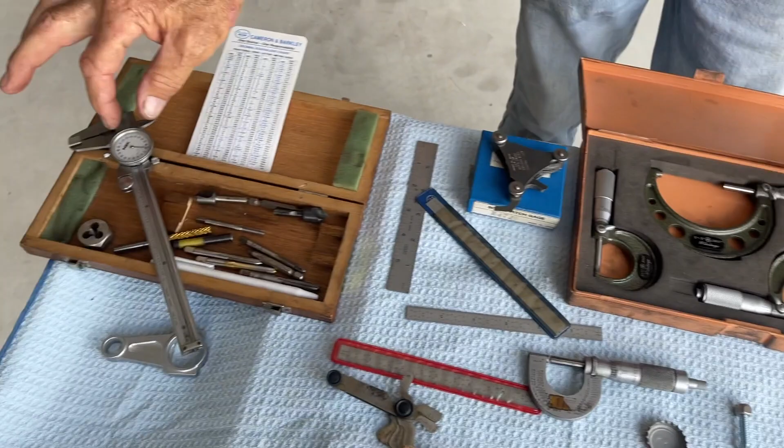And how do you do threads? What is threads? Let's go into a brief explanation of this. Without further ado, let's start at the bottom.

Of course we will. Let's say we have a typical quarter 20. You say, well, how do you know it's a quarter 20? What does quarter 20 even mean?

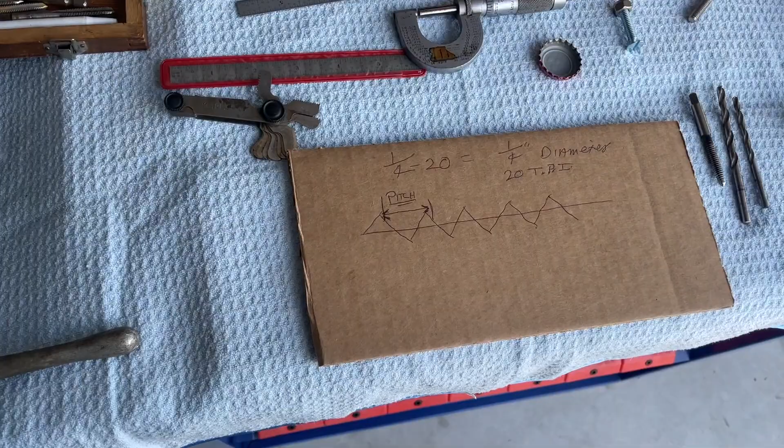I drew up a little chart here, and if you'll have a look, see, here's what it says. In this bolt that we have here, it tells you that the diameter is 1/4 of an inch. Now that's outside diameter, even of the threads or the... it'll be both.

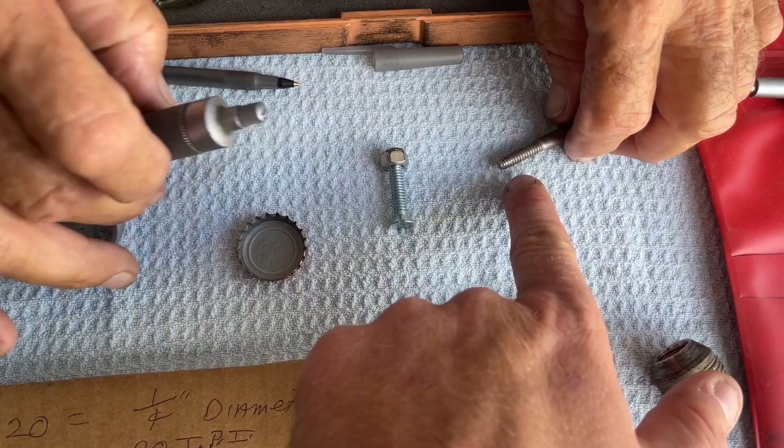Say if we're going to measure it here, let's take this one. Notice we have both. This is a Brown and Sharpe instrument here, some micrometer. There's several companies that make them out there. You just want to check it.

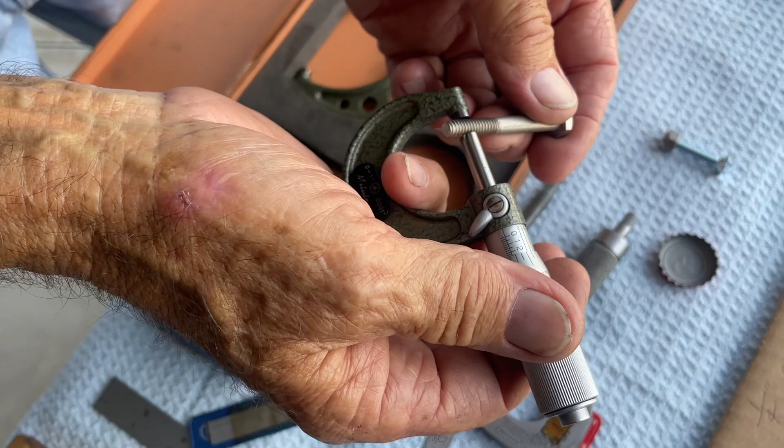So let's take... and that's 1/4 of an inch. Now, it measures the same out here on your threads, 1/4 of an inch.

Now you're saying, whoa, hold it just a minute, you're getting way ahead of us here. Let's start with our micrometer. How do we read this? How do you read that? How does the mic read?

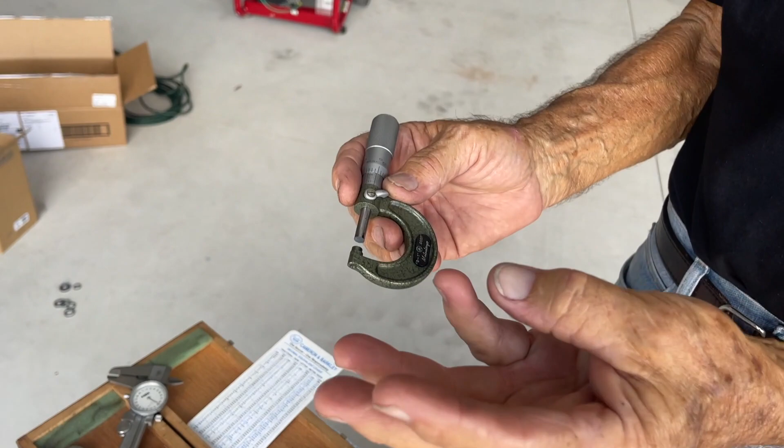You're saying, what is that, a micrometer? This particular one here is from 0 to 1 inch, is what it will measure, by 10,000ths of an inch. That 0 to 1 tells you that by 10,000ths of an inch it will measure that full 1 inch. It's quite accurate for such a little gauge, a little piece, sure is.

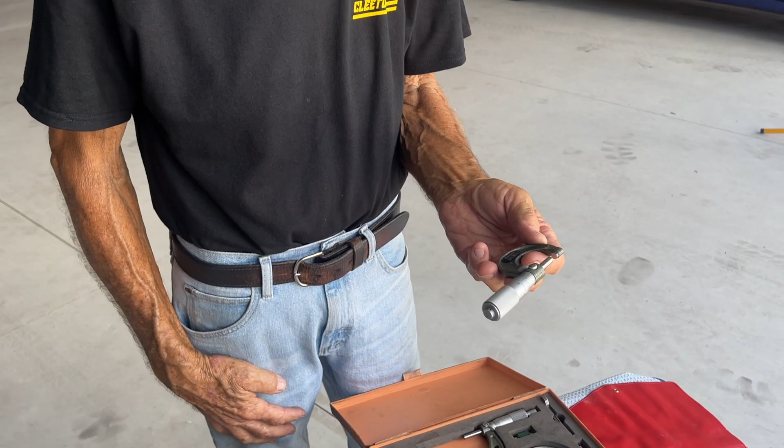And you're saying, well, how does it do that? Well, it in and of itself doesn't do it. It's up to the operator to do it. So let's take that. First thing we're going to do is check our instrument.

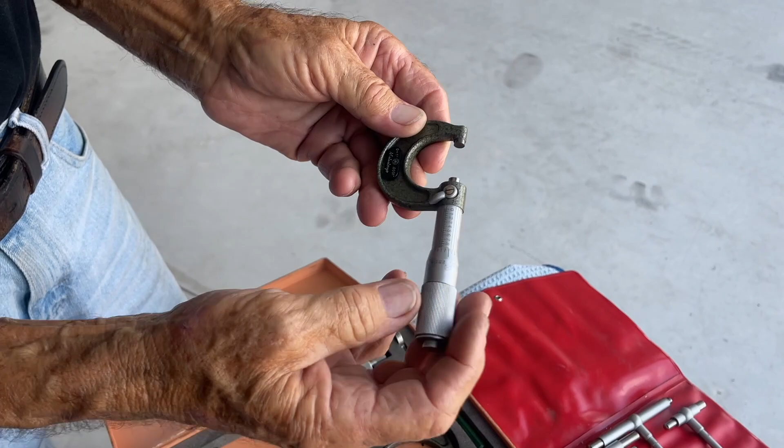And we're going to come out here to 1 inch, which is here, and that's from 0 to 0 here. That'll be a full inch out this way here. So, well, okay, what do?

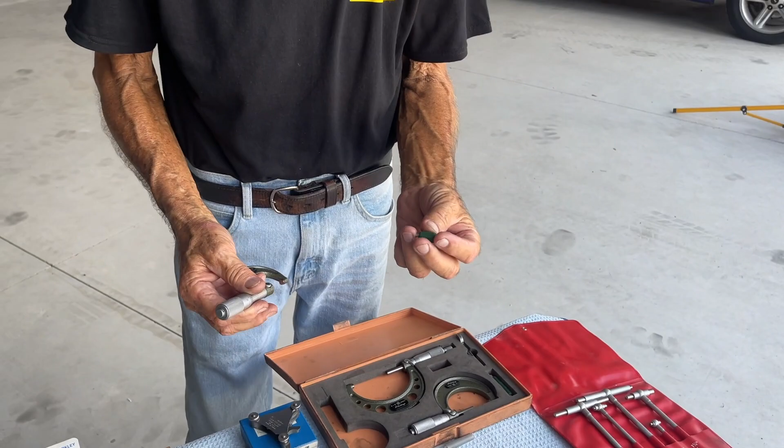Got your, when you buy that instrument, it comes with its standards. This is within about maybe 20 millionths of an inch accuracy on this.

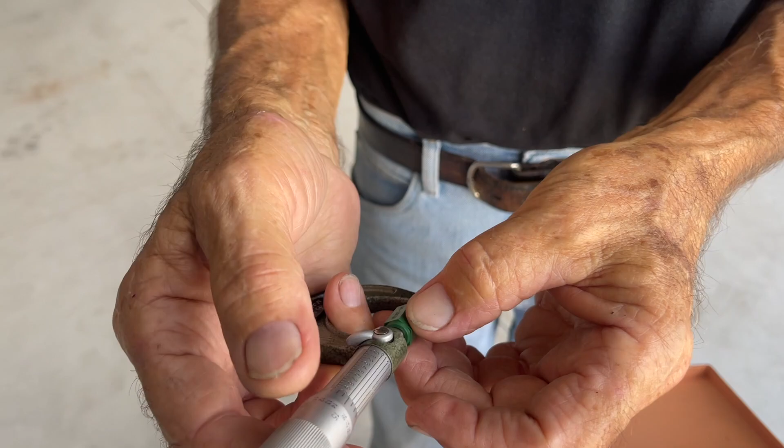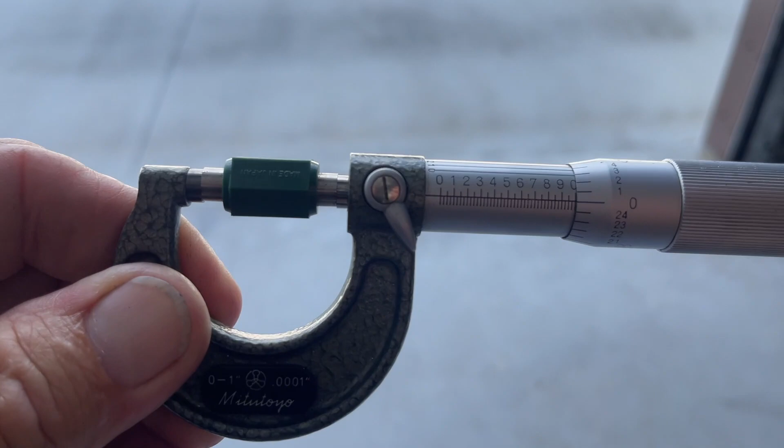So we're just going to check this to here and see, is it there? Where you at? Wouldn't you know it, double zeros? Let me get that. It's all the way through.

Some people ask me sometimes, well, how do you hold one of these? It's a delicate instrument, yes. Why not do this? It's a little machine shop practice. Just take your little finger, hook it into that thing, and then you got the others to work with here. Can't get out of your way here. There it is, there you go.

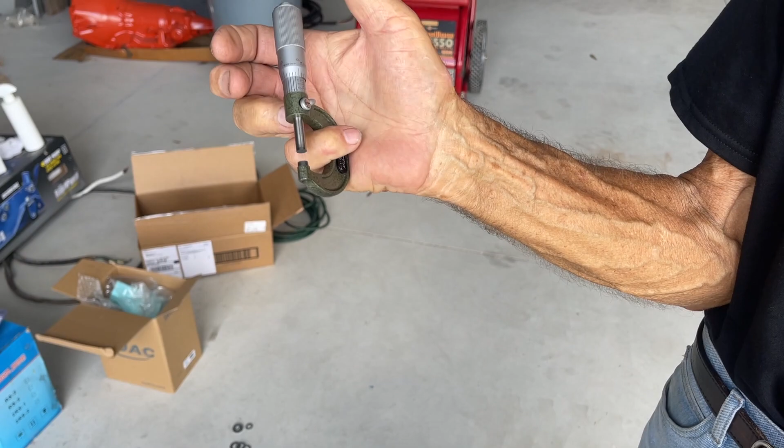And you can take your part when you have it like that and just bring it up and measure. There's Sam's tip of the day. Turn it up right to here.

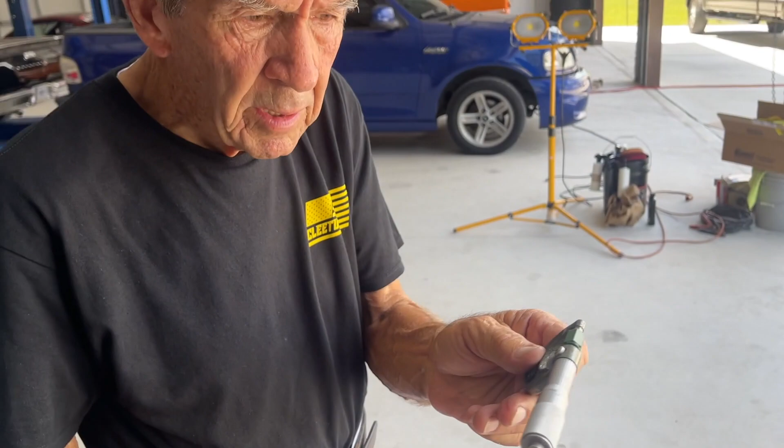So now let's look at the instrument while we have it here. You have your standard set in here, it measures the inch. You say, well, what's all them little lines and stuff around through here? Let's go into that briefly.

Let's take our standard out, I'll just drop it out here. Notice the way this is graduated. You have 0, and you got a little line, and then a big line.

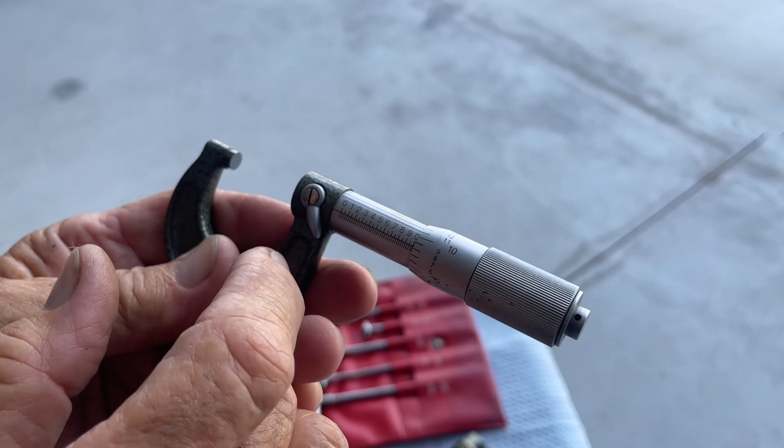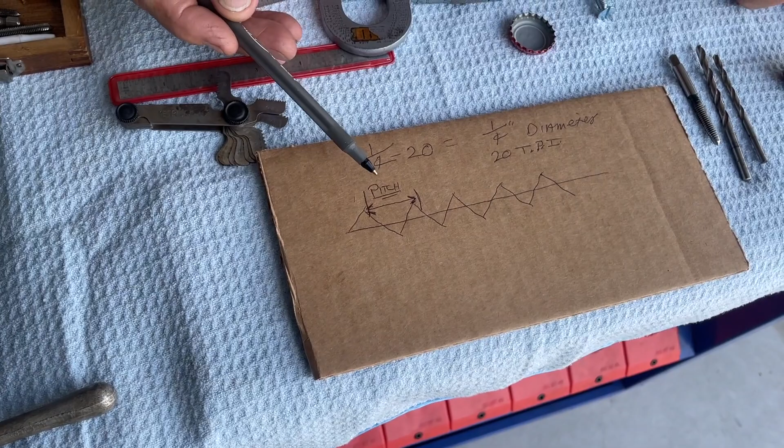That is this, imagine this thread running through here, if you will. And the pitch of that, when you turn this one revolution here, say let's come down to, let's start off down here at the very bottom.

And this right here is called an artificial feel, if you will. It takes it away from you trying to wind it up. So when it comes down, so that you don't over tighten it or underdo it, see, it does it, and it'll just keep spinning, but it's at your 0.

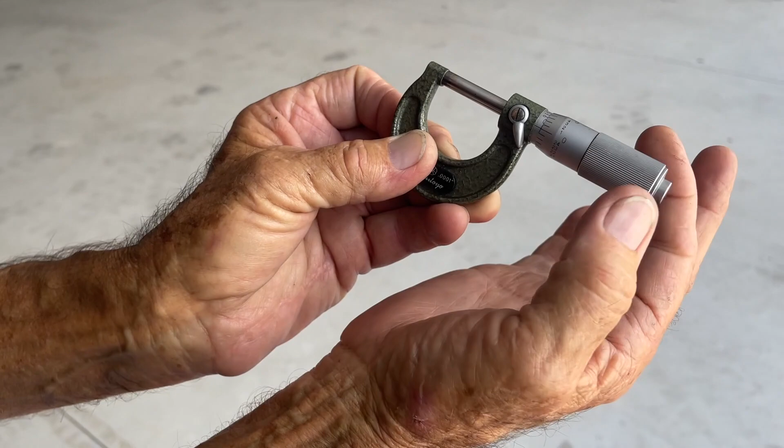Okay, so now if we go out here, one full turn. This thing's graduated from 0 to 25. So let's go one turn.

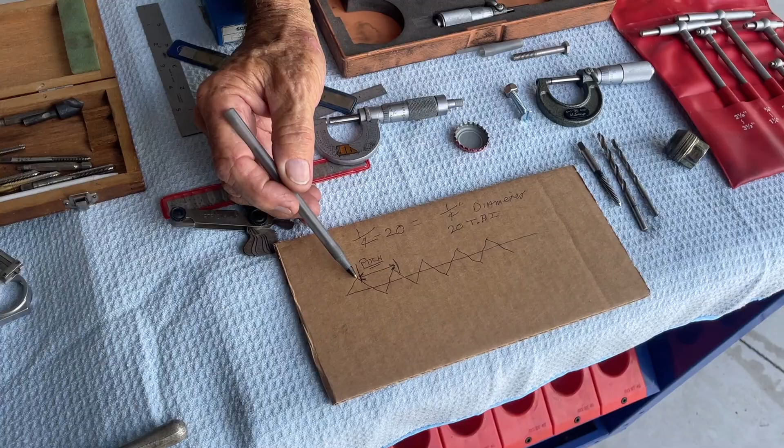That's 25 thousandths of an inch. That's where the gap here will read 25 thousandths. Looking at it on paper, that gap would be going from here—this is the high point of a thread.

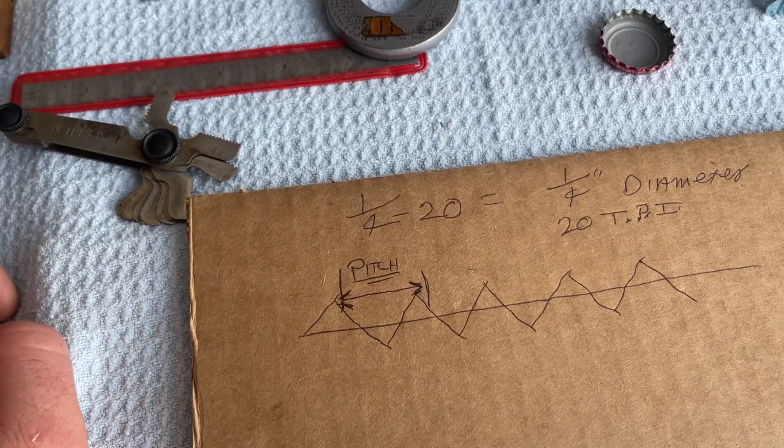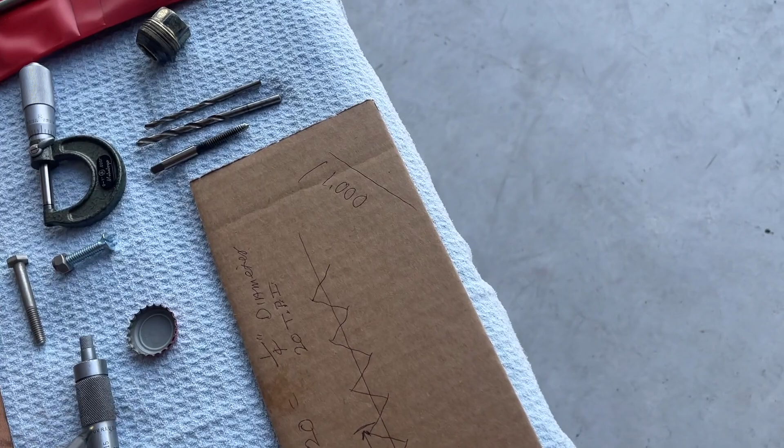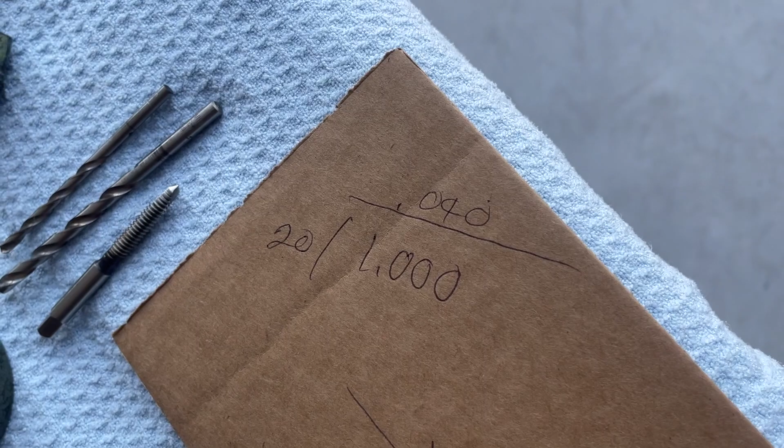It's fuzzy math. We had a quarter-20. Twenty won't go into that, so if we've got 1.000... what does that tell you? That tells you the distance on your pitch—from here to here, here to here.

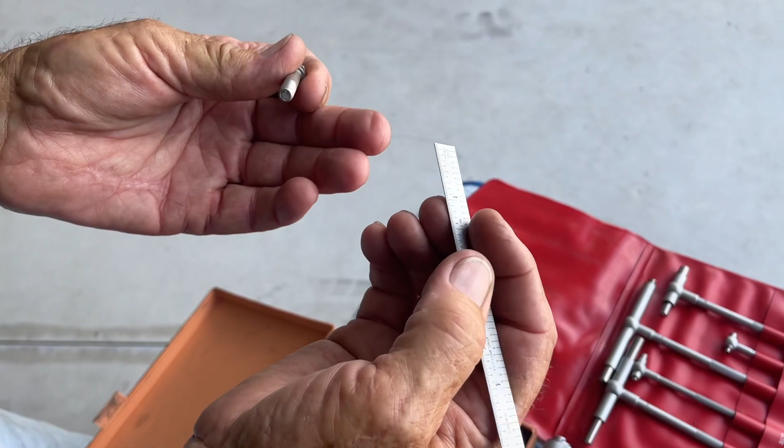That is that distance. So with that said, that 20 is the threads, and this is the full inch we have here. Let's take our scale—a scale is just a quick measurement of something, graduated in tenths, hundredths, thirty-seconds, sixty-fourths.

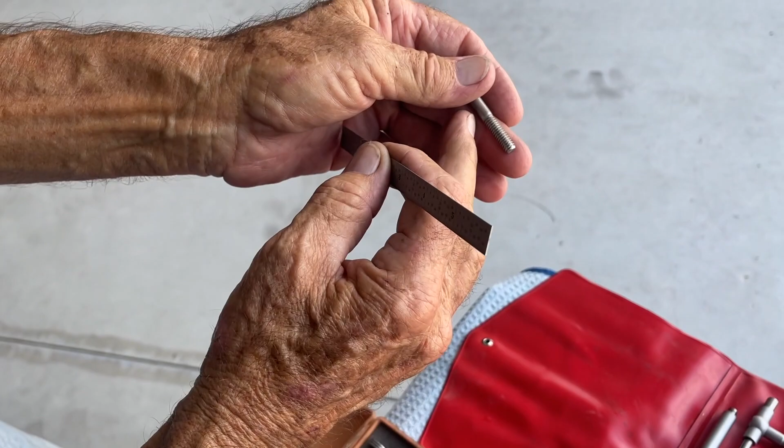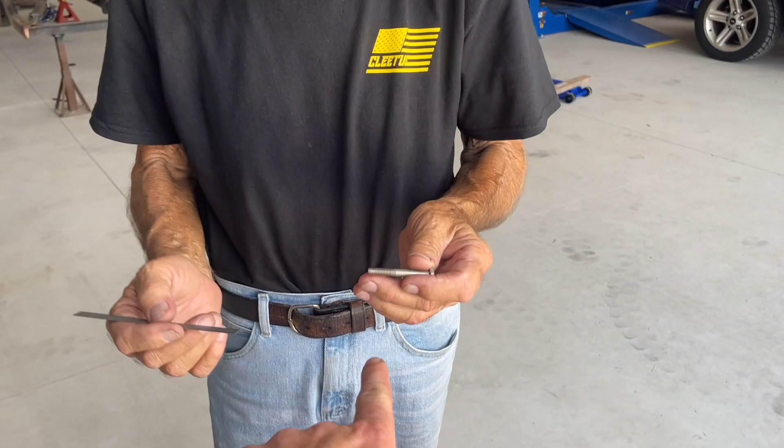Let's say we were going to do a full inch here. It's not quite cut down for a full inch, but in that inch we're going to have 20, as indicated, and in 1 inch of bolt length we're going to have 20 threads. So a quarter-20 means it's a quarter inch in diameter, and there's 20 threads per inch.

The pitch is the distance between one point on your thread here to the same point on the thread over there. That's the pitch, if you will.

In our next session, we're going to the metric system—don't try to compare, like this equals this, or 9/16 is to 15. Let's let each system stand on its own. Today we're going into SAE. SAE stands for Society of Automotive Engineers, so when someone says that's an SAE, now you know.

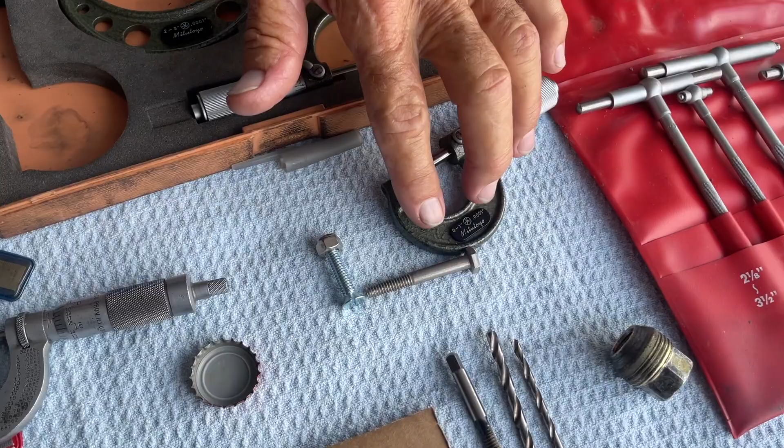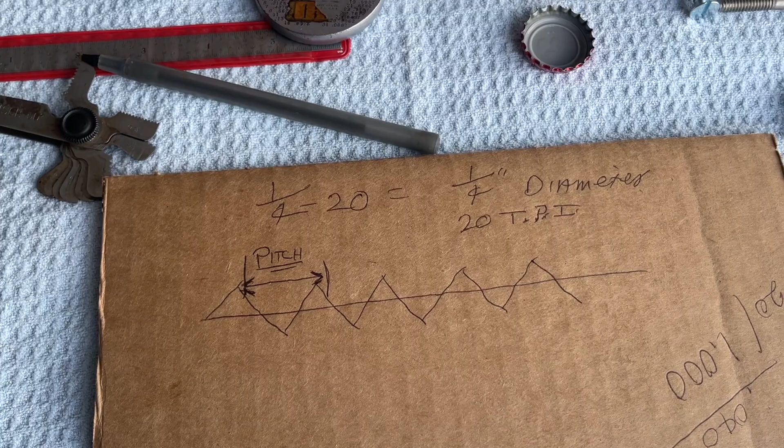The quarter-20 bolt we have here—we know how we got to the threads, we know all the particulars of this bolt. We also know the pitch is from one point on the thread to the other. And when you're referencing this, not all bolts are that way, but now you're going to know.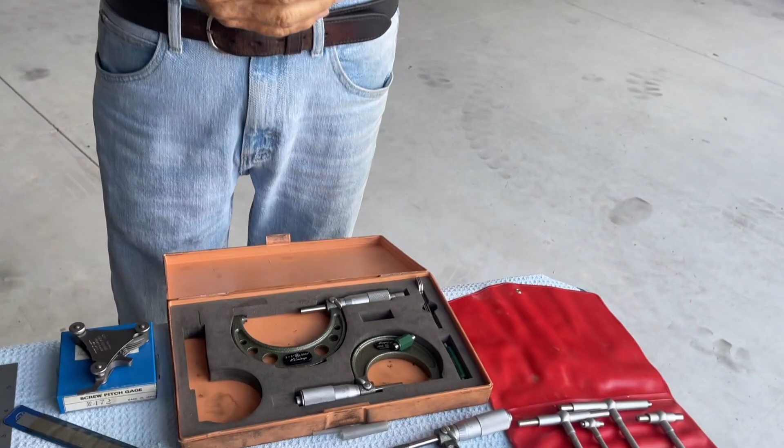You also have a quarter-24, which tells you it's a quarter inch diameter on the bolt, but it's 24 threads per inch—so you'd see more threads per inch. Someone might call it coarse or fine, or you can get specific and say it's a quarter-20 or a quarter-24. There are variations, but that's the general reference.

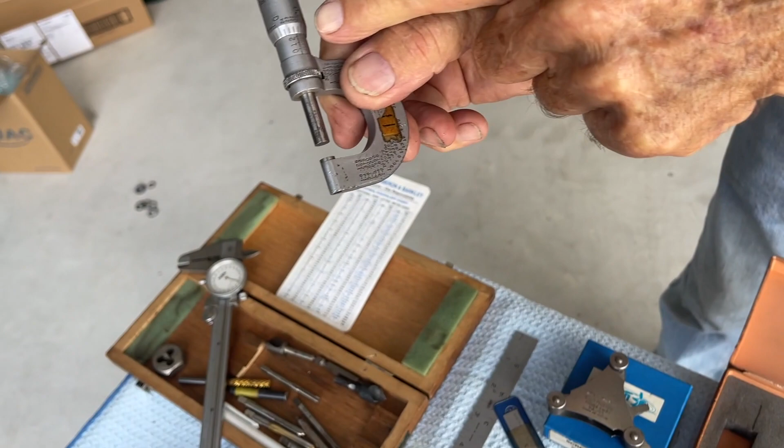You might ask, how would I know that if I just picked this bolt up and measured it? Using either of these, they're the same. I'm down here at a quarter of an inch, and they'll give you the machine tolerance, which is 2 thousandths. These won't be exactly 250 thousandths—it's usually plus or minus 5 thousandths when they're made.

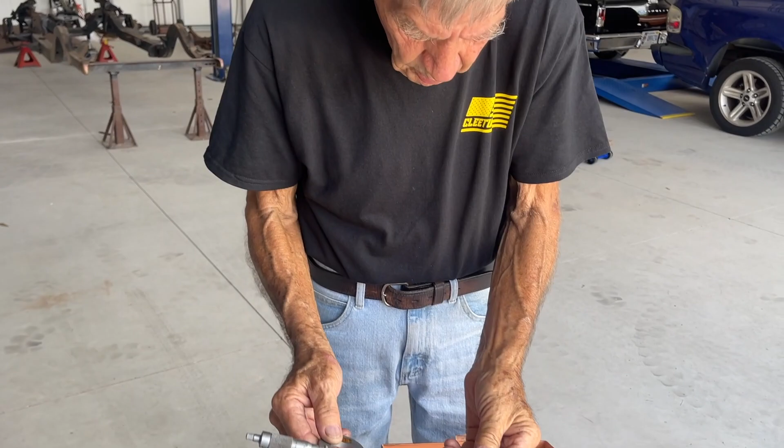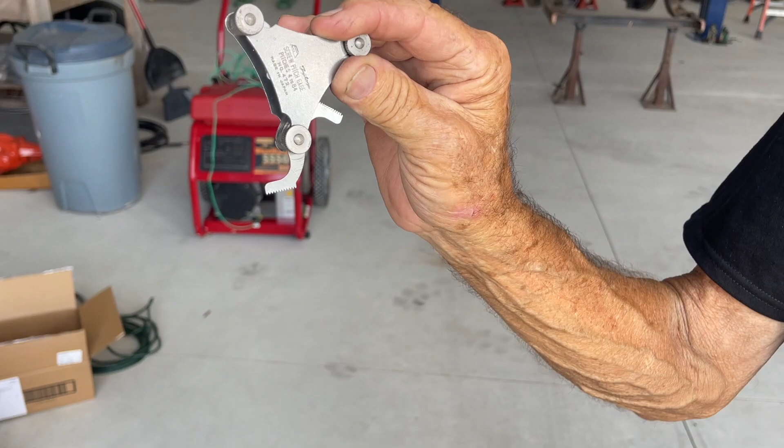So with that measured, let's say it's a quarter of an inch—how many threads has it got? We'll start with a thread gauge to make it easy. This particular one, it's not cheating, just in the interest of time.

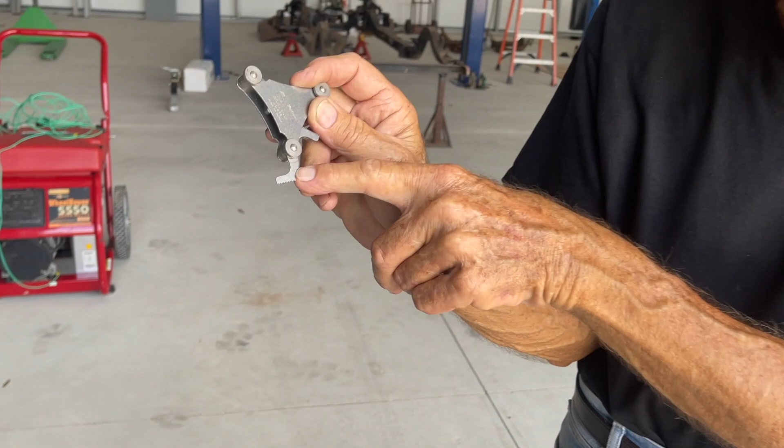This little gauge here says it's 20, and it's going to measure in 20, so let's just set it up in there. Look at that—fits right in there exactly like we wanted. Let me get a good angle.

Could you show us one that would not just fit take in there? Like the 24, maybe? Let's take one here, just the next one up.

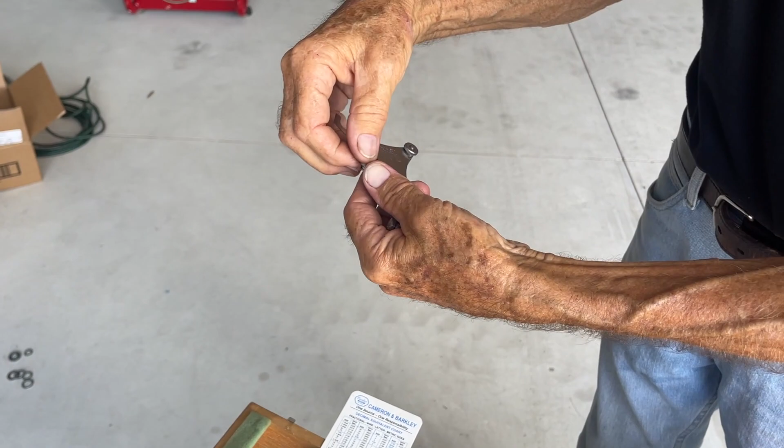Here we give you some closeness on it. Here's even a 22, and you think, well, that'd be close, maybe it'll fit. No, it won't. Doesn't go. Yeah, not even at all. It just won't do. And it's the same thing.

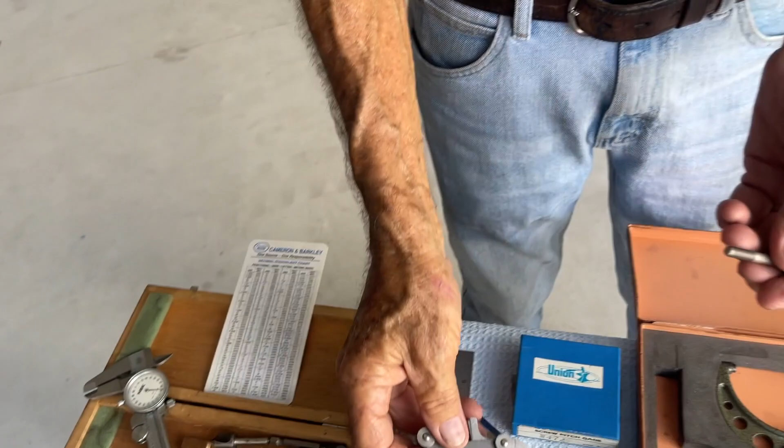So you say, well, okay, it measured a quarter of an inch in diameter. That 20 gauge went right in there. So I should be able to put a quarter 20 nut on it. Yes, you should. So let's take this.

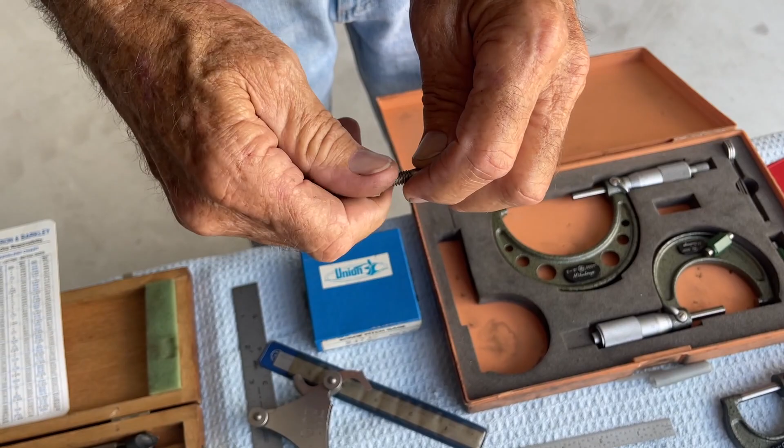Well, how do I check that? We'll show you. You can first see if it's going to fit. Okay, it did. So now, if you want to check the ID of this, let's check that. What are you using? A couple of ways you can measure it.

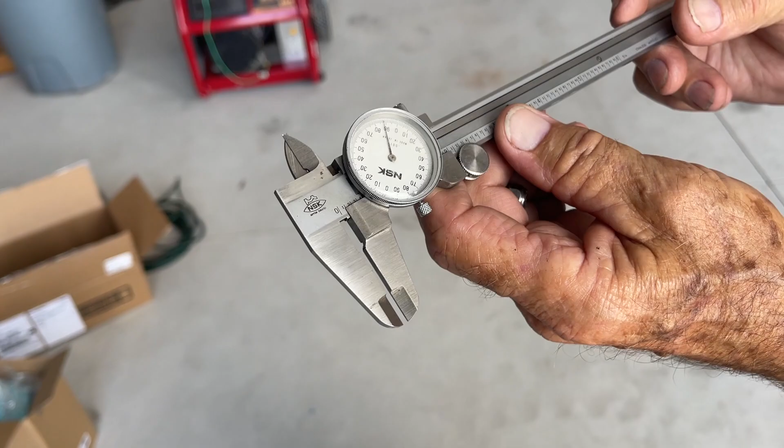Let's take this. You want to take your verniers, and they refer to it in the machine shop as verniers, but it's just a slang thing. It's called a vernier. And zero it out. People say update him, get him into the digital. Either one, as long as you get to the instrument, zero your gauge.

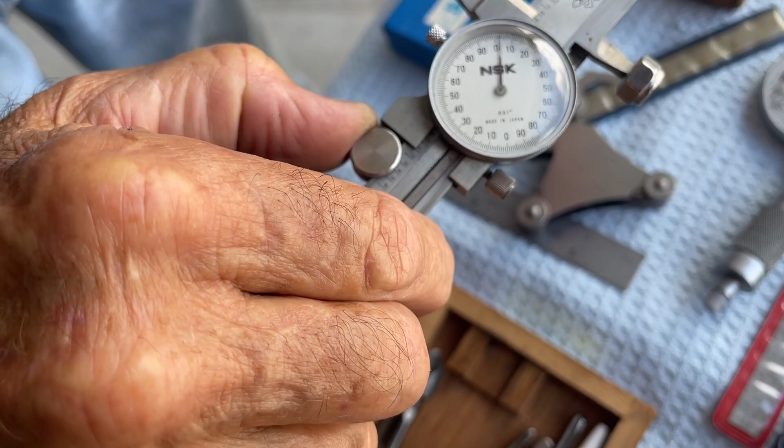Now let's check the ID of this first. Would you look at that? Let's see. Okay, you're saying, well, that's not a quarter 20. Okay, you're not. You're exactly right. It won't measure exactly, because it's not 250 going to the depth of the threads. Very good.

Got it. Park you right on top of it. Got it. So, and you're saying, well, what's the other way of measuring that?

You can go to something like what they call a snap gauge. And while we're there, let's just measure one. This snap gauge won't go that small, I don't have the one that goes down to about this small. What here? It will measure that.

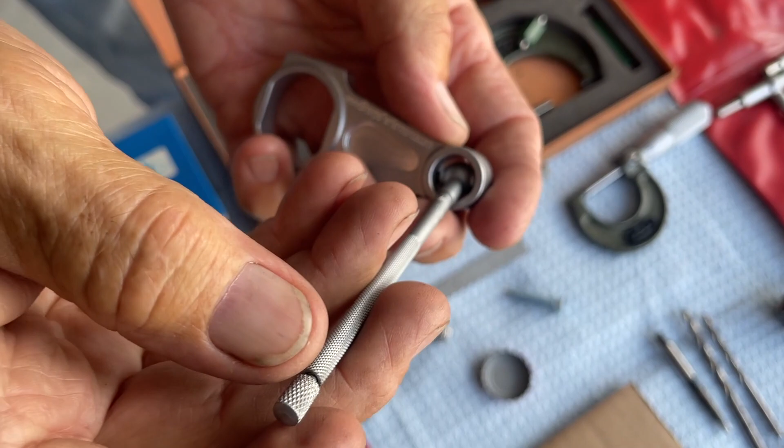So let's take, you put it into here. And just release it. Oh, I see, it's spring-loaded on the end. You want to tighten it right here and then just twist it. Bring it out. Got it.

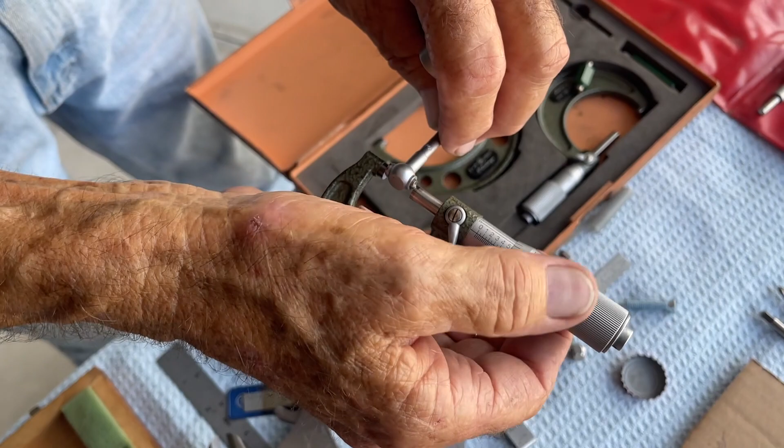Then take your micrometer, check what that is. That'll be the ID of your hole.

Now, they meant for it to be somewhere around 550. 550, okay, 550 thousandths something. So you're saying, well, could we also check it with a vernier? Sure, just give it a check. There it is. Look at that. 550, just about. Well, that's about 48, which checked 48 on your snap gauge there.

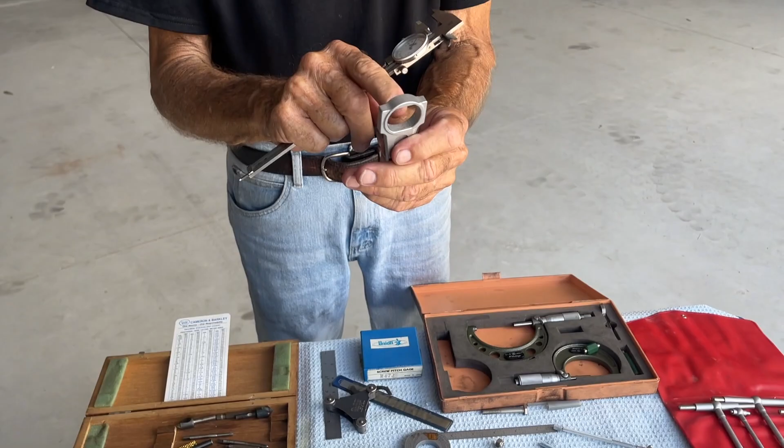Those are some of your basic starts, and you can do the same with your large one down here. Just go up to a different size on your snap gauge here.

Okay, and to get there, you say, well, how do I do these? Are that the connecting rods out of George's Blazer? Yeah, this is out of the Blazer here. See that? There it goes right here.

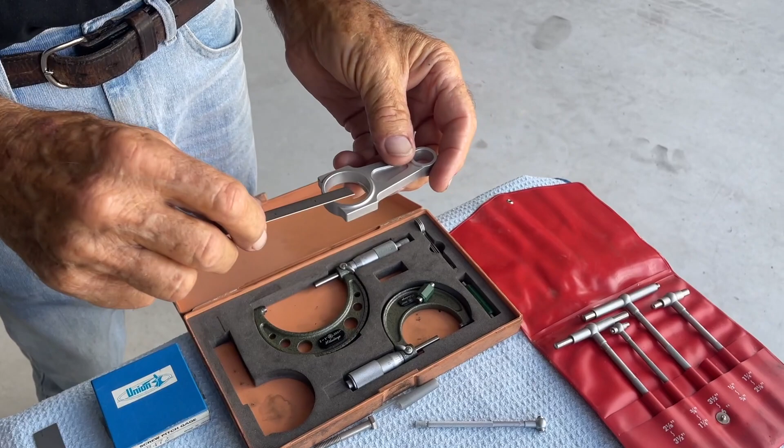There's no mystery about it. Once you get your basics down, and that's what we're looking to do, I want you to remember on these, it's a delicate instrument, but treat it correctly, it'll do your lifetime. Sure will on the thing. But buy good ones to start with. I'm not advocating either one of these on anything, but just buy good instruments to start with.

And the same on your scales, the same. These are made by LS Starrett here, but as long as it's a good scale, and you say, well, how do I know if it's a good scale? Measure it. Take something that has a digital readout if you want to, and check the length here and some of the graduations on it.

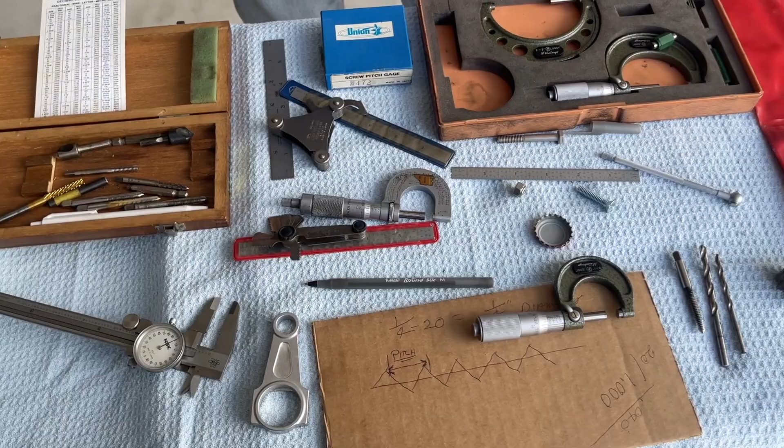So a good starting place would be to have a scale, your micrometers, snap gauges, and a vernier caliper, and then the, what do you call it, the thread gauge. That's the thread gauges. Okay, and it's just good starting places on it, and you say, well, okay, now that we've got that, what can we do with it?

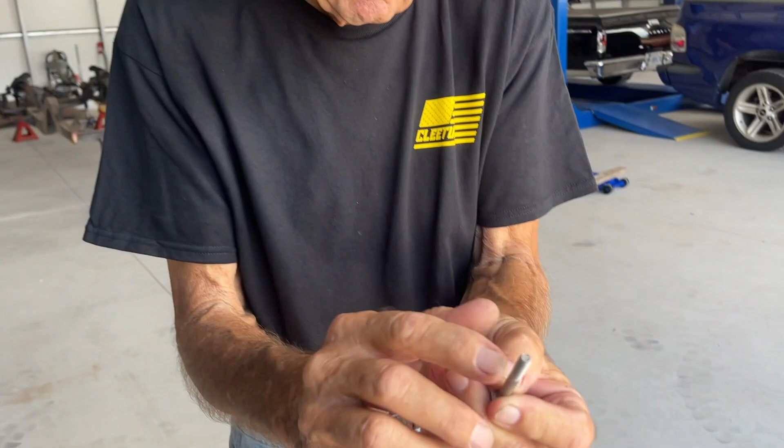Got it, you're saying okay, what is that? This is a typical die, it's a quarter 20 die. And you would, if the thread is already on it, well, let's just say that we're threading this up here.

And I had this set up in a vise, and I wanted to go deeper with my thread here, I just keep going up there with it. Now then, would this be a tap then?

What I was going to say was, let's just say that if we wanted to make a hole for a quarter 20 bolt to go into to hold something down, okay, let's start out - you say well, where do we start? What do we drill with on the thing?

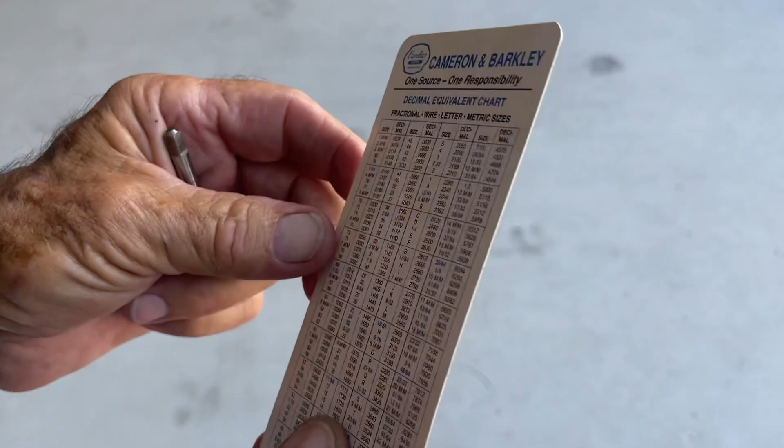First off, let's do this. Let's consult our little chart here. And it says quarter 20 - imagine that - it says to use a number 7 drill. And a number 7 drill, just flip your chart over. You say, well, what diameter is a number 7 drill? We'll go right down and do it. It's 201 thousandths. Ah, imagine that.

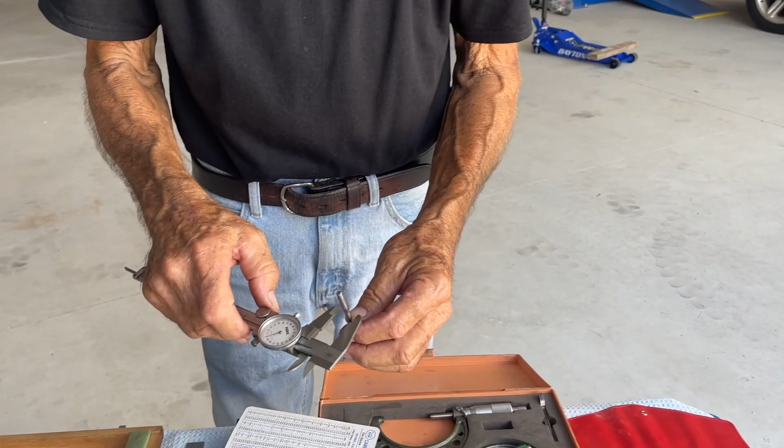Take whatever measurement you want, if it's just a quick measurement you want to do. Imagine that, up here we're going to be off about 2 thousandths, and that's about the standard on these - 201 to drill. But don't drill it all the way first.

Use a lead drill, less than. This is an 1/8 inch lead drill here. So you will come down to where your heavy hole was. As far as lead drills go, you said you have an 1/8 inch there, and we're going to be drilling it for a 1/4-20.

Do you generally do your lead drill about half of what the final hole's gonna be? It depends on the drill's depth, on your final hole that you're going to. Now when we're saying 1/4-20, or maybe 5/16-18, 3/8, something like that, usually 1/8 of an inch on the thing. What you're looking to do is, if you just go in with your big drill first, usually with that much pressure you get a little wobble and it'll make your hole too big. So you want to have some accuracy for your bigger drill to go into.

Your smaller ones have a better lead in, generally speaking, when you go in here to cut your initial drilling, cutting your hole - a little bit better on those. Whereas the bigger drill has more of a cut out on the flutes than it does at the very center. I see.

We take it and set it up. Take your center punch and make a hole exactly where you want it to be - or not a hole, but a little place where your drill can go into. Don't let it be walking around down here. You can hand drill it, machine drill it, whatever you've got there.

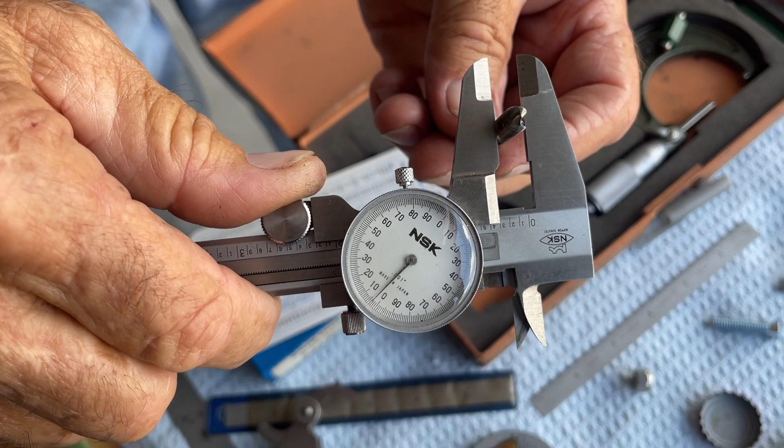When you've got that, now it's time to come back with your 1/4-20 tap, which will stay around here, 1/4-20. And you can check this out, it doesn't hurt to check it out on anything. Just give it a quick - now should be 1/4 back here, which it is, and should be the same up here.

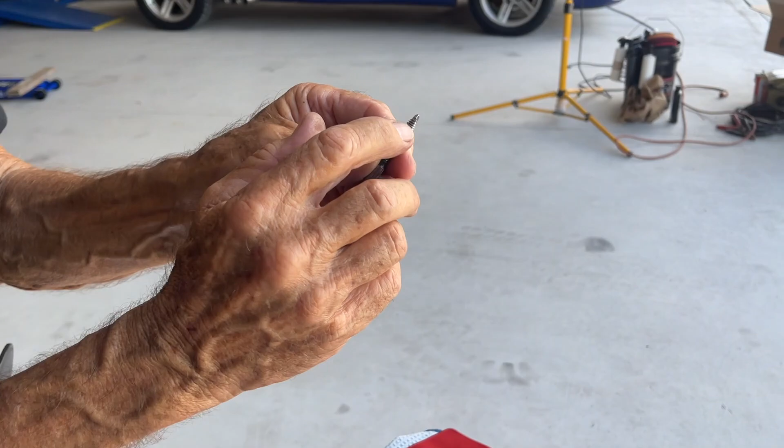Now, this - see the lead on this? It's not a full thread at the start, and this is a starter tap. And you'll hear people say a bottoming tap or a starter tap on the thing.

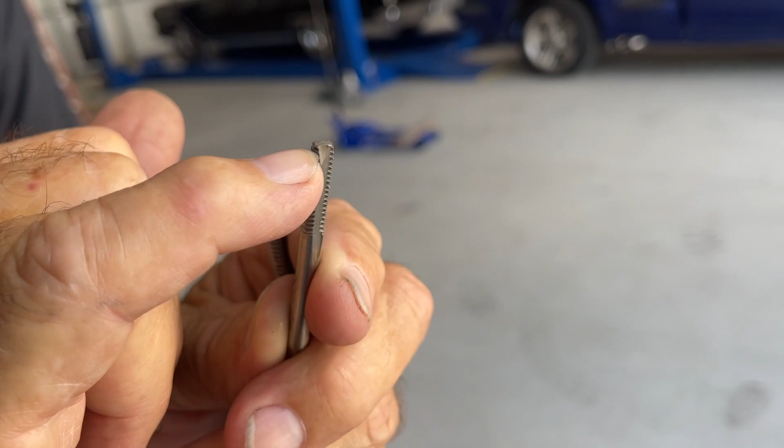Now look at the difference - that's a bottoming tap, meaning the full thread is all the way to the end. And if you had a blind hole that you're going down into, it'll thread it right to the very bottom.

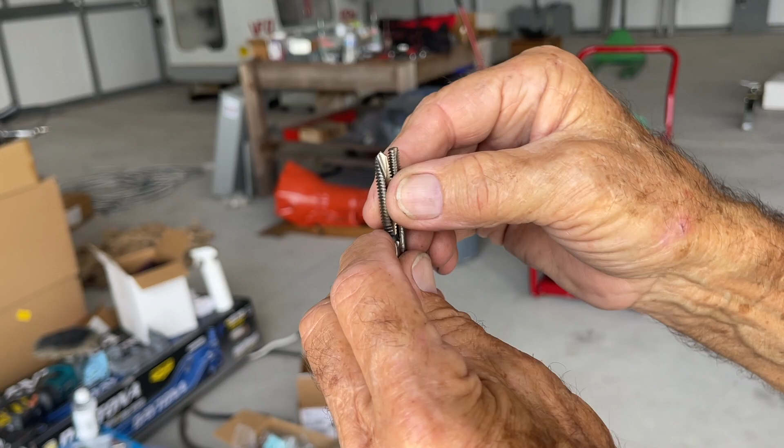Look at the difference between those two taps. This one won't cut all the way down to the bottom—it'll get down to the bottom, but you won't have threads all the way to the bottom. See the difference? So you have a bottoming tap, and then you have your starter tap. Now, if you've got a good through hole and it doesn't matter, you use this one all the way through, because the threads up here are the same.

Once you've got that, then you're done. You can put this in. Just make sure you go to whatever the hole depth is going to be onto your bolt, and the correct length of it. And you're saying, well, how do you check the length of a bolt? Just quickly, here's what we got.

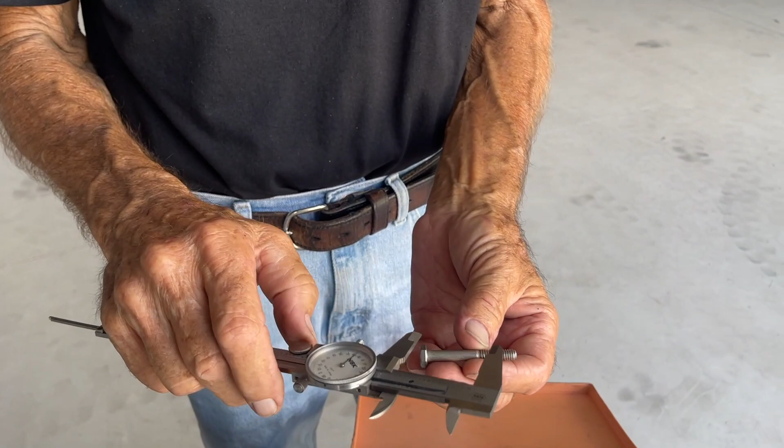Some folks are going to tell you to check it this way. That's incorrect. You want to check it from underneath here to out there, like so.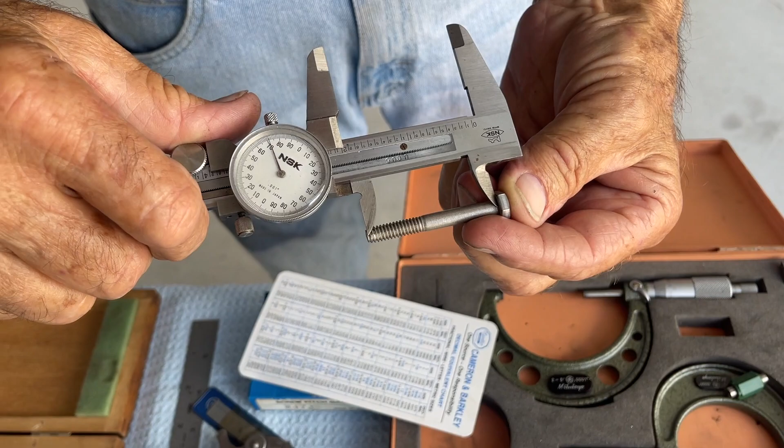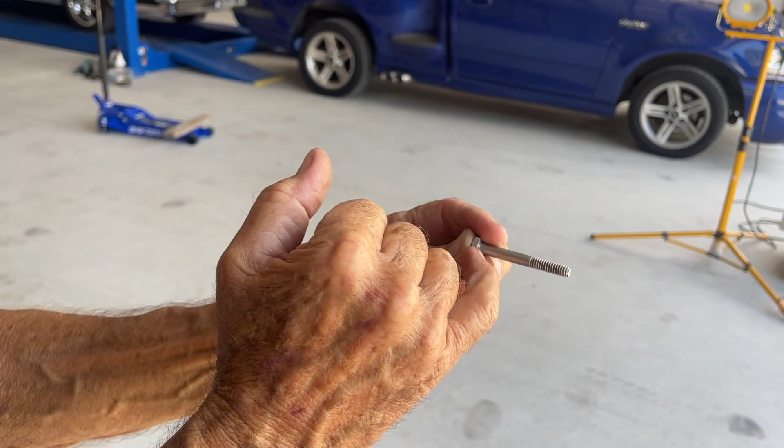Got it. So it's actually about right here—1.9, it's going to be right there. It's a 2-inch bolt. This is a 1/4-20 by 2, because you're going from underneath the head to the very end. Got it. So it's 1/4 inch diameter, 20 threads per inch, 2 inches in length.

Makes sense. And then, like I said, in our next session, we'll go over the metric system and how we do that. It's the same, but it's a little bit better system, if you will. People are going to say, well, why do you say that? It's a different way of measuring, a little bit more precise way of doing it.

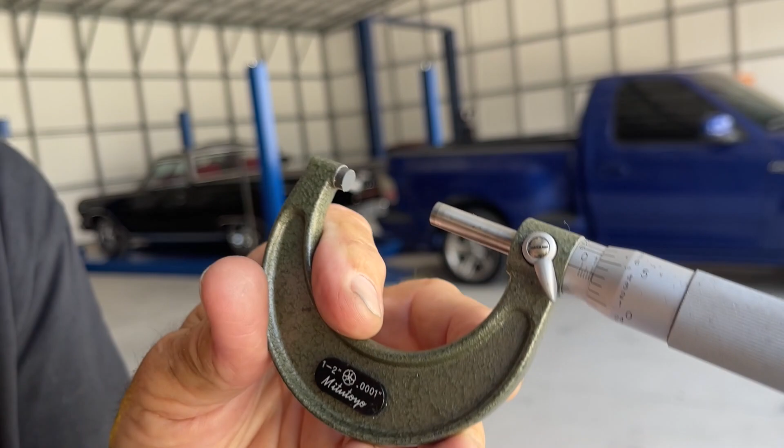Okay, now just a quick review. Back to our basic instruments. Now here you have a 1 to 2—that simply tells you it'll measure everything from a 1-inch diameter to a 2-inch diameter. That's all it says on it. It also has standard thread.

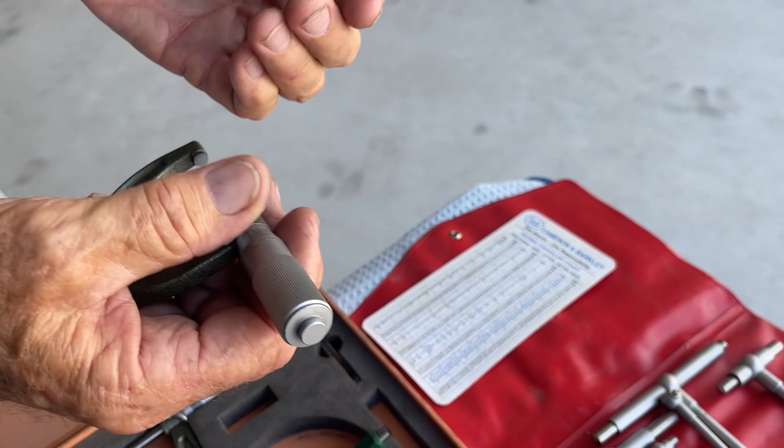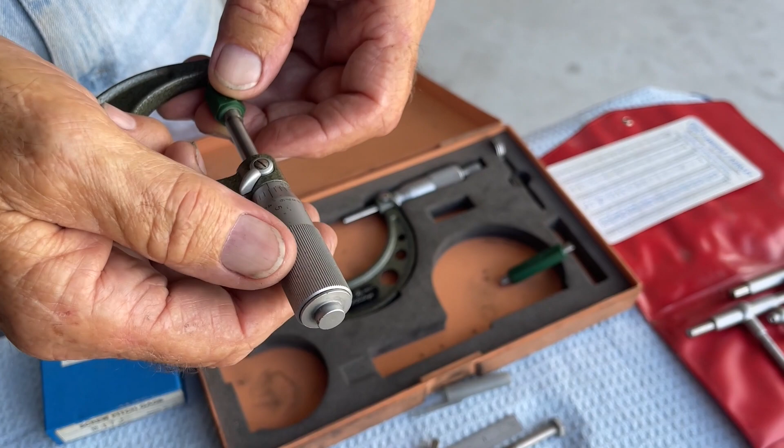Now, get up out of here. We'll go down to 2, and you should come to 0 when you get there. And you're saying, well, that's the same one for the 0 to 1? Well, sure you can, because you're going down to a 0. You want to set it straight into your piece here.

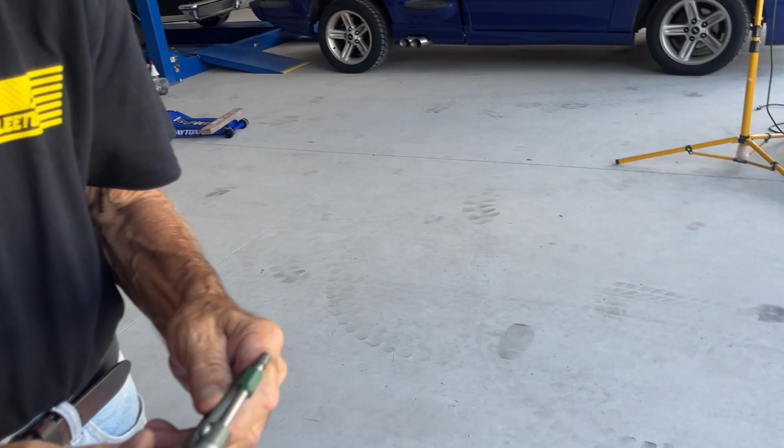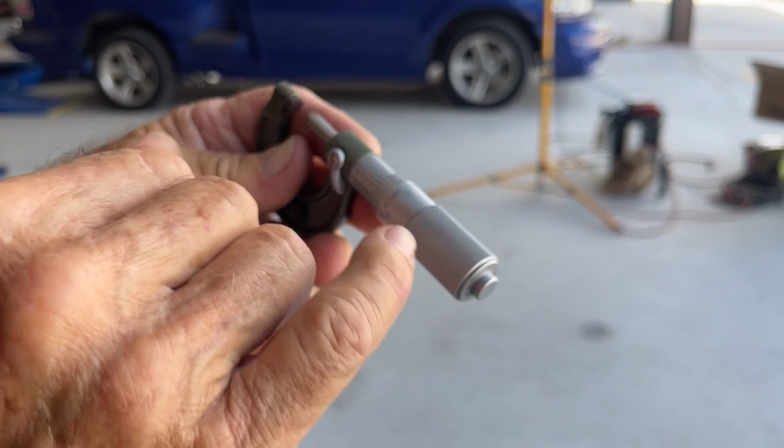Yep, zeroed out. Now, a minute ago I alluded to what are the rest of these marks around this. Let's take a look at that for just a moment. Let's take this 0 to 1 here. You see you have the line starting here, and there's another line going around this way.

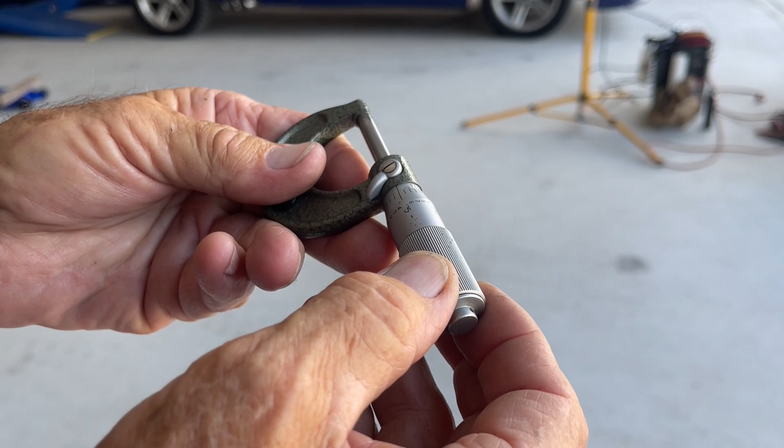Now then, you would read that as 10 thousandths. Hold on, I'm not focused. Okay, you read it as 10 because you can see one of the lines, right? See, now you're at 10, but it's between it.

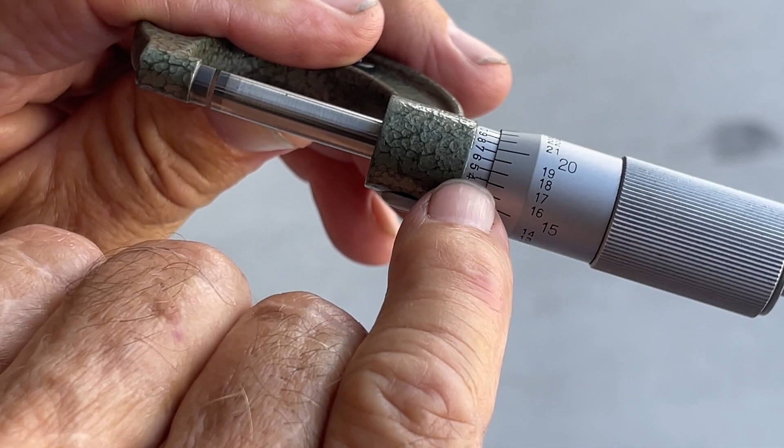Just rotate your piece, and whichever line lines up here, call it the 5, or the 4, or the 6—look right there. We'll call that a 5, okay? Because that's your one.

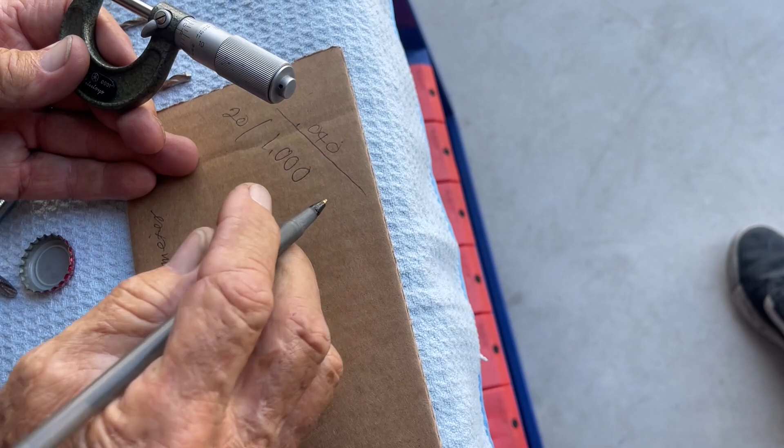And you'll hear different machinists refer to it a different way. They'll call it, it's 10 and 5. They're not going to say, what's 10 thousandths and 5 ten-thousandths? No, in machine lingo, they'll say it's 10 and 5.